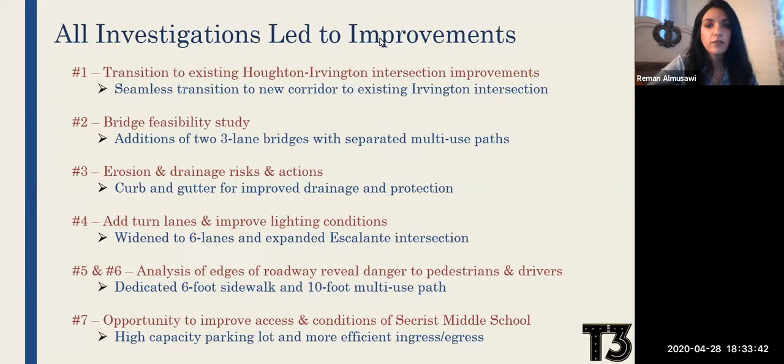Thank you, Reman. To begin, you can see on this slide the opportunities that we committed to investigate nearly one year ago. Since then, all the alternatives for every single one of these objects listed on the slide were investigated to ensure we designed the most efficient product for each of these challenges and opportunities. Every one of these challenges was looked at as an opportunity, requiring coordination and collaboration of multiple team members from different disciplines. The successful design meetings and discussions between the disciplines demanded that we found the best solution, not only for the immediate improvement of this corridor, but also for the future service and sustainability of Houghton Road. The complete study of these opportunities exemplifies the dedication T3 had to every detail of this project.

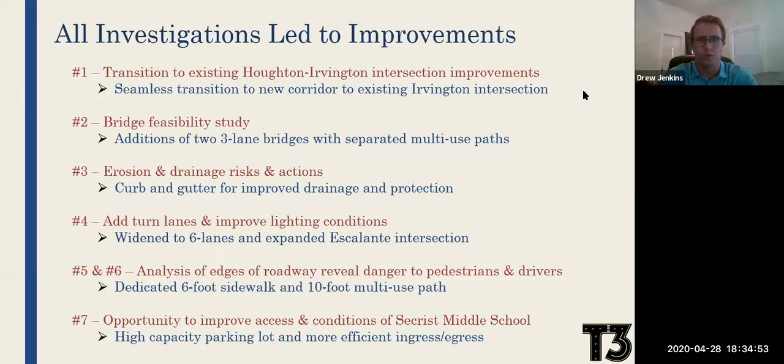As you can see, every single one of our investigations resulted in an improvement that has created a very successful project overall. Now, as we move on to the next slide, we'll see some of the details for Houghton Road.

The design of the Houghton Road corridor was very much focused on safety, not only for vehicles, but for vehicles and non-vehicle users as well. We started by looking at the safety of vehicles by expanding the roadway from 2 lanes to 6 lanes with a 20-foot median in the middle for a better level of service throughout the corridor. Also, for safety of the vehicle, we eliminated the erosion along the edges that was a safety hazard, and improved the drainage with the curb and gutter system and different culverts that we've installed, which Leo will be talking about later.

One of the other things we did to improve the safety of non-vehicle users: on the west side we have a 6-foot sidewalk, and on the east side we have a 10-foot multi-use path. On the bridge, we have a separated multi-use path with a barrier in front of it to ensure non-vehicle users are able to use all parts of the corridor safely without being too close to the roadway or interfering with traffic on the north and southbound lanes. All of these were considered and analyzed so we're able to use the maximum amount of space while purchasing the minimal amount of new land.

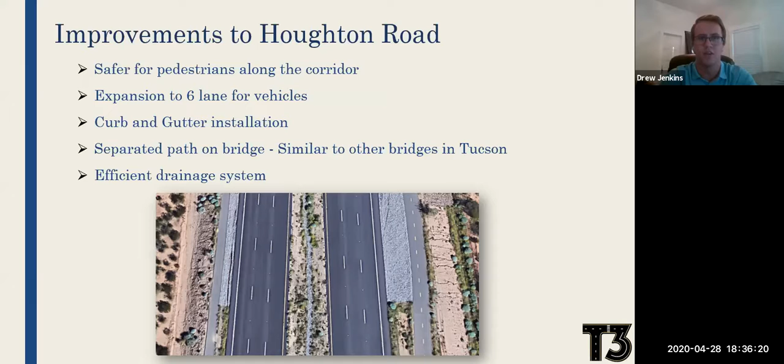As we move on to the next slide, some of the other improvements we've made outside of the Houghton Road corridor are at Secrist Middle School and the Escalante intersection. Beginning with the improvements at the Secrist intersection, we began with one purpose: to reduce the congestion during peak hours at pickup and drop off at the beginning and end of each day.

One of the ways we did that is by making better turnaround stations to get in and out of the school along the Houghton Road corridor, and also improving the ingress-egress for the bus turnaround so buses are able to more easily go in, pick up the students, and leave quickly. Another major consideration for these improvements was the safety of students, faculty, and parents approaching the school, which we addressed by redoing the parking lot so it's a lot safer during peak hours and also allows for a greater number of cars to be parked.

In addition to the change in parking lot design, we were able to add new parking spaces around the bus turnaround, so faculty staying late or sports coaches will be able to park there and stay out of the congestion during peak hours. Having a larger parking lot at Secrist will allow a bigger capacity for cars to park, which will also allow future growth for the school.

And some of the other intersection improvements we made in detail is the Escalante intersection. Escalante intersection was also designed with safety and sustainability in mind throughout its lifetime. We did this by improving the roadway itself, expanding it to have a dedicated left-hand turn lane and right-hand turn lane on the Escalante roadway, as well as dedicated left-hand turn lanes on the Houghton Road corridor.

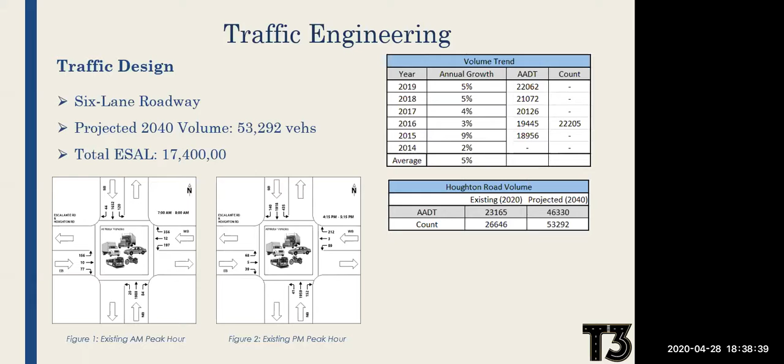Thank you, Drew. For this traffic design, we needed to make assumptions before we began. First, we knew we wanted a 6-lane roadway since we were tying into the existing roadway to the south of Houghton Road. From that, we needed to determine the number of projected vehicles we would have in 2040.

First, we needed to determine the volume trend. This we were able to take from PAG, the Pima Association of Governments. From there, we took an average and multiplied that by 20 years to get about 100% growth. This means we're expecting the roadway to have about double the current number of vehicles it has right now.

We were given 2 counts, one from PAG and one from an independent agency. We decided to go with a more conservative number by taking the largest count and multiplying that by 2. So as you can see, for the projected 2040 count, we're projecting about 53,292 vehicles along this roadway. Another assumption we needed to make was the total number of ESALs.

We predicted about 1,740,000 ESALs, which is used to determine our pavement design for this roadway. We're expecting no more than about Class 8 vehicles to be on this roadway.

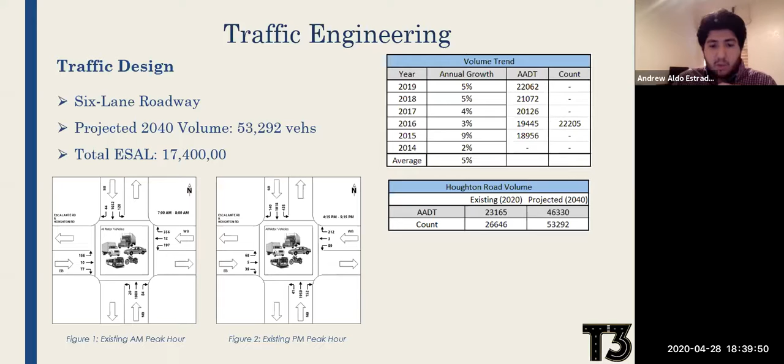In our next slide, I'll be discussing the lane geometry for the Escalante Road intersection. Along with this expansion of the roadway, we needed to redesign the intersection. First, we needed a new optimized signal as well as new turning lanes for the roadway. In order to determine this, we used Synchro.

Using Synchro, we were able to plug in what we knew so far, which was the number of vehicles, and test a bunch of different designs to see what met HCM and city standards. From that, as you can see in Figure 3, our intersection design, we have 3 lanes going both north and south, and 1 lane going east and west.

Each approach has a left turning lane. However, for this project, we assumed that only the north and westbound approaches would require a right turning lane. As well, in Figure 4 you can see the turning phases that we will have for this project.

So we would have protected phases for just the left turns, and then we would have protected-permissive phases for the right turns. At the bottom, you can see the lanes we determined for the turning movements based on the LOS, delay, and queuing we see along these turning movements.

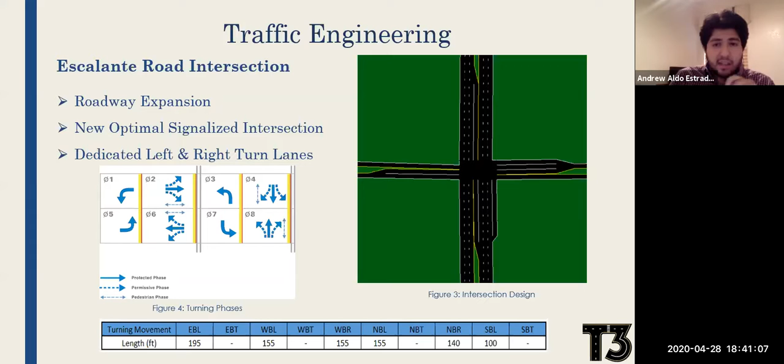So we know that this roadway will effectively be efficient for working in 2040, when we would be looking at this roadway again to see if it needs any new updates. We know that this project meets the requirements and has a lot of room for growth based on the design we've done so far.

Currently, we only have right turning lanes on 2 approaches. If we add more right turning lanes, we can easily increase the serviceability of this roadway, and we would focus more on working with the city and seeing what they want in their future design.

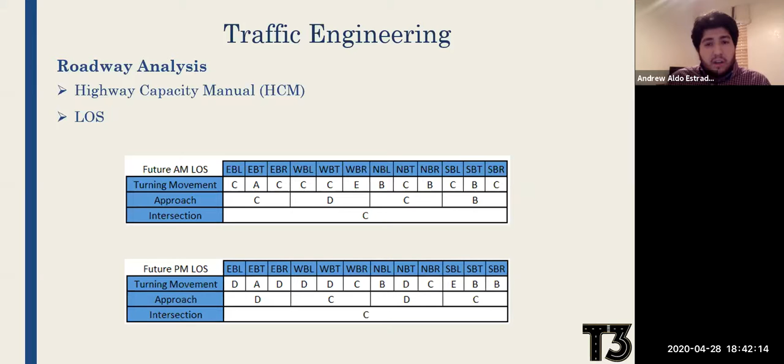Lastly, on our last slide, we're going to talk about traffic safety and crash data. From the crash data we were given back in 2007, we saw that the Escalante intersection had about 12.8 crashes per year, and Pantano Trail had about 1.8 crashes a year. Pantano Trail is a small intersection that comes into Houghton that isn't really seen, so it's quite dangerous, and there's no real stop sign there.

We know we're going to make safety improvements to this roadway from what it has currently. Right now there is no median, no turning lane, no curbs. So we're adding a new 20-foot median, as well as curbs and 6-foot shoulders, which should increase safety for the roadway, along with new signalized timing so vehicles can quickly move through the intersection without delay, as well as adding right turn lanes and dedicated left turn lanes so it's easier for vehicles to turn.

Another important aspect of this roadway is pedestrians. We're adding a multi-use path since they'll be using this roadway as well. This is a very density-filled roadway that will soon develop—the area isn't really developed right now, but later it will be. So we want to make sure pedestrians have the opportunity to safely cross the roadway and travel along it, which is why we're putting about a 10-foot space between the edge of the roadway and the multi-use path.

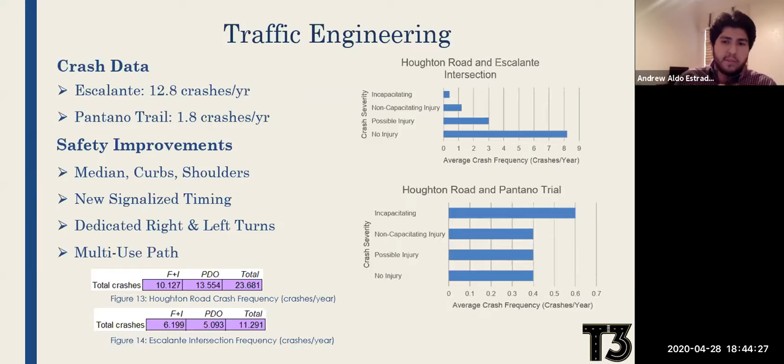So next, I'd like to pass it off to Leo, who will be discussing the hydraulics for the project.

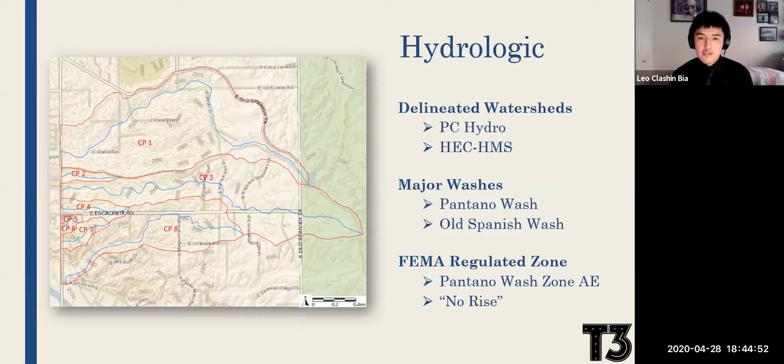Thank you, Andrew. For our hydrologic analysis, we focused on 8 concentration points. For these, we delineated the watershed in Civil 3D on 2-foot contours provided by Pima County. 5 of the concentration points were calculated in PC Hydro for 100-year events, while others were given by the City of Tucson. Notable washes are the Pantano Wash and the Old Spanish Wash.

The Pantano Wash is a FEMA regulated zone, so it has extra requirements such as no rise—meaning it cannot rise in elevation more than 0.1 feet.

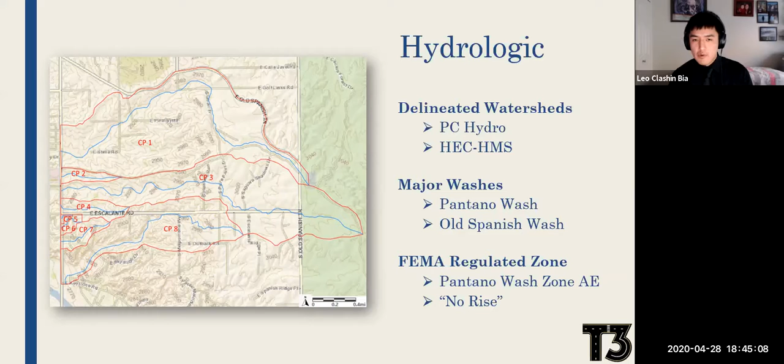On our next slide, for our hydraulic features, the culverts, we designed 8 culverts with a 1.1 to 1.5 ratio for culvert height to headwater. For culvert 5, we were able to extend it since it already dissipated the existing discharge of the wash. For culvert 8, the sedimentation value was over 1, so that culvert would possibly need maintenance in the future.

Also for right-of-way, we designed the culverts so they don't rise over 1 foot from existing to proposed conditions. For erosion mitigation, it follows the no-rise or right-of-way requirement.

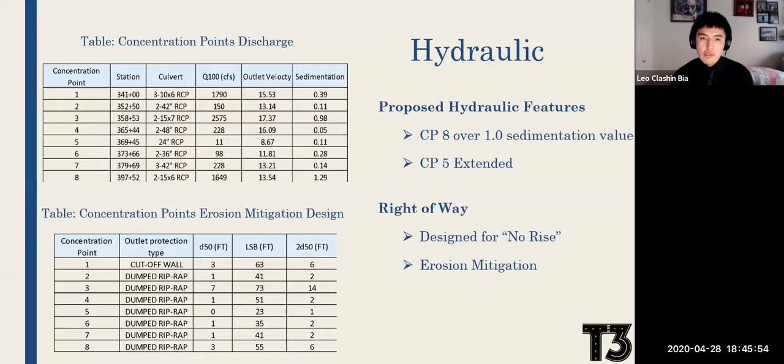On our next slide, we'll go over the Pantano Wash Bridge. For this bridge, we cut out a cross section to create extra area for discharge to go under the bridge. This was done since the existing bridge only had 0.5 feet of freeboard, and our proposed design now has 5.0 feet. The required 3.0 feet was increased to 5 since we cut out a cross section.

There's potential for equilibrium sedimentation, so there's possibly a smaller cross section needed in the future. We accounted for that to accommodate potential sedimentation down the line.

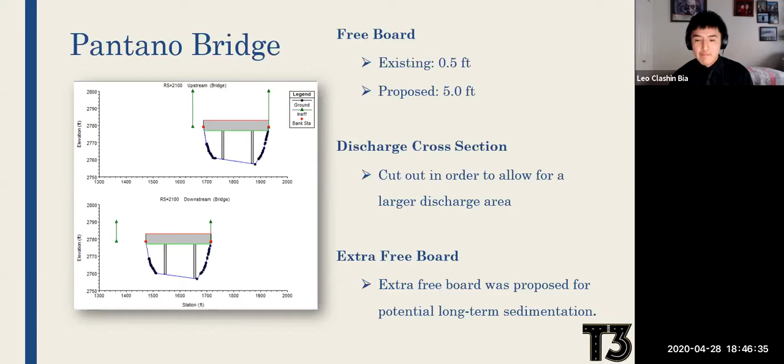Now I'll pass it on to Ariana, our geotechnical lead.

Thank you very much, Leo. So yes, I'm going to be talking about the geotechnical and roadway design aspects of this project.

We're going to start with the piles under the bridge. To start, we were given 5 borings. They went down 126 feet and were located at 5 locations along the bridge track. What we found looking at these borings was that almost all of it was sand. We didn't reach the water table in those 126 feet. There was no bedrock, no caliche—it was basically sand all the way down.

Because the measurements were taken using the standard penetration test, we used a method for calculating the force that a pile can sustain that directly uses values from that test. You can see the results on this chart, where the different colors show the different diameters: 4, 6, and 8 feet. The other thing we had to consider was scour.

The predicted 100-year scour in the 100-year flood is 51 feet, so we assumed those first 51 feet provided no support. We found that an appropriate pile to take the calculated 780 kips of force on this bridge would be 8 feet in diameter and 66 feet deep.

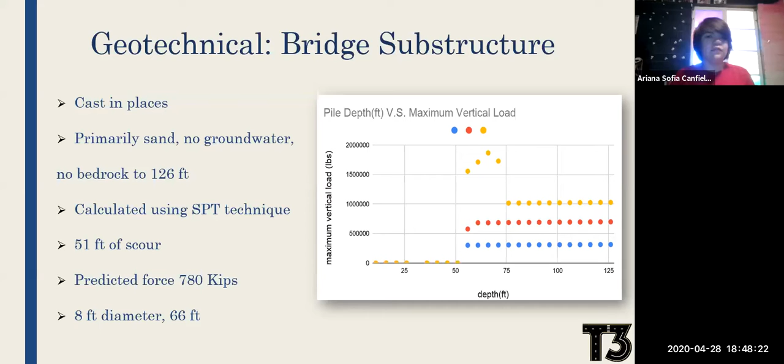Looking at the soils under the roadway, there was some concern that we'd see acidic soils. Luckily they're non-acidic, and they're also very low in silt, so they have very little collapse potential. That's something we don't need to worry about.

There are some expanding clays present in some layers, but not very much, and we think we can mitigate any deleterious effects from them by just mixing our soils.

For our actual roadway design, we were given the ESALs by our traffic team, and based on those and the measurements taken, we got a structural number of 4.95. This number is pretty large, reflecting a fair amount of uncertainty that could perhaps be decreased with additional measurements. But using this value, we can accommodate it with 6 inches of asphalt and 18 inches of aggregate base.

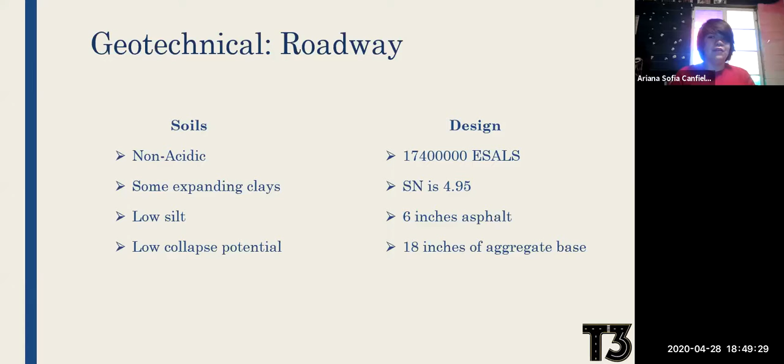And now I'd like to pass it off to our structures team, starting with Joel Hernandez.

Thank you, Ariana. Right now, as you can see, that's how the bridge currently looks on present day. When we were designing this bridge, the first thing we took into account was that when you're going up the bridge, there are 3 lanes merging into 1 lane, and that could cause a potential accident because of people who may be reckless or distracted while driving on the bridge.

So we coordinated with roadway and were able to get a new design going. We decided to design 2 bridges, one for each direction, each having 3 lanes. The reason we did that is because it will be more cost effective, as we currently looked through our different designs, since we also considered widening the bridge.

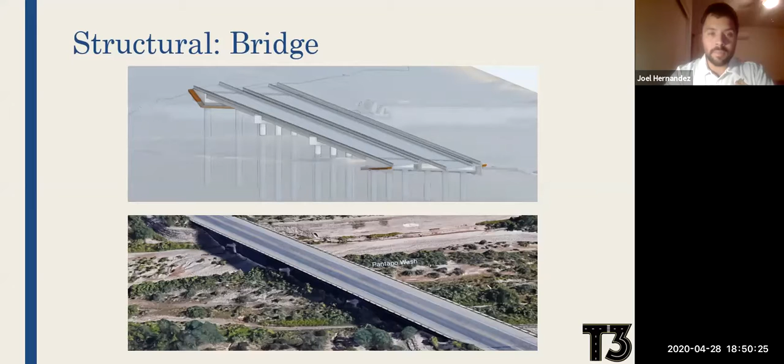If you go to the next slide, here's how the design looks. Currently, that was one of the things we were looking at.

Another thing we wanted to take into account was that the bridge is currently not up to code. Due to the rising population in the area, we noted this was another main concern. One of the things we did was look at other structural elements and speak with other entities. Now Danny's going to talk to you guys about the drilled shaft and other structural elements we were looking at.

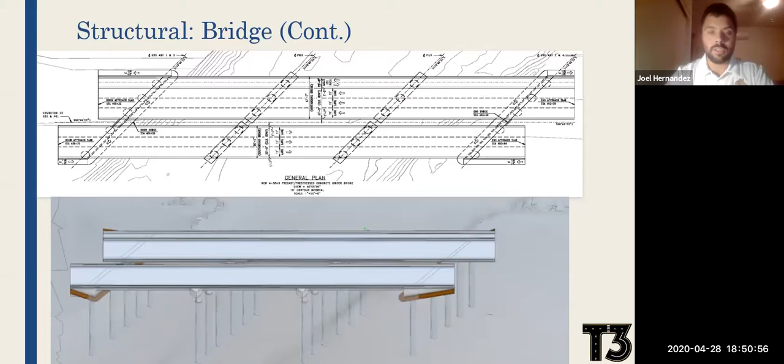Thank you, Joel. What's important to note are 3 things. First, we had to coordinate with hydraulics to determine water level and freeboard height due to the 100-year event in Pantano Wash. Second, we had to raise the bridge approximately 10 feet vertically to accommodate the pathway below, allowing pedestrians to move from the southbound side to the northbound side to utilize the multi-use path as mentioned before.

Third, the use of a 3-span design with AASHTO Type 5 girders at 120-foot spans, totaling 360 feet end to end. These design parameters provide economic benefits and, as mentioned earlier, are commonly used design practices in Pima County.

As for the substructure, using HS20 loading per AASHTO standards and per traffic's recommendations, we calculated the maximum axial load transfer of 780 kips each. With this information, Geotechnical was able to determine the required depth of the 8-foot diameter drilled shafts, recommended at 66 feet deep. Furthermore, due to the 3-span design, we were able to significantly limit the cost by utilizing fewer drilled shafts overall, as construction will point out later in this presentation.

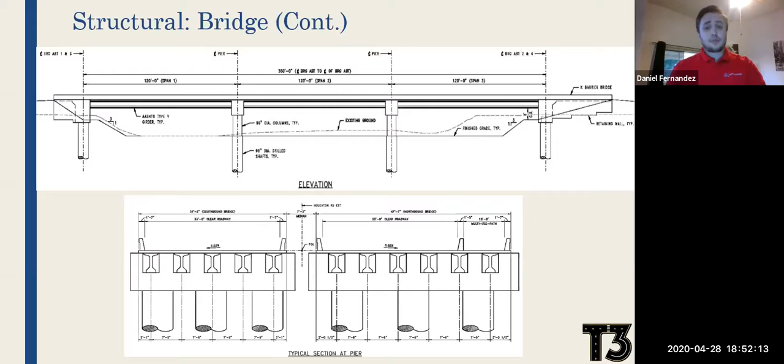Another area just as valuable as structural, believe it or not, is our very own environmental. Edgar is going to go over the environmental aspects of this project. Thank you.

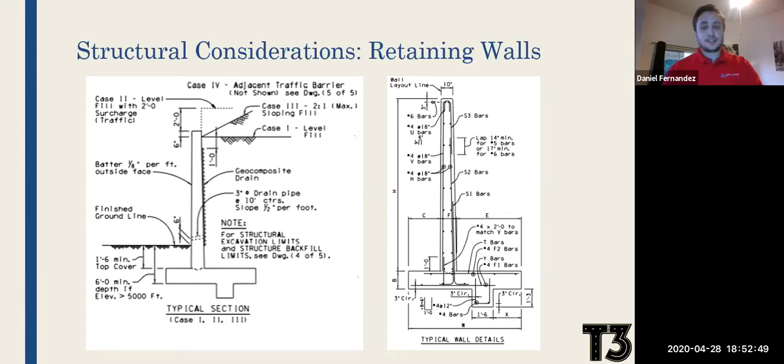Thank you, Danny. So the two important aspects to consider for the environmental portion of the project start with the SWPPP. The SWPPP focuses on several points that include the soil types, disturbed area, control measures, training, and monitoring, as well as the BMPs shown on the site maps. These BMPs include erosion, pollution, and sediment control parameters. In addition, these BMPs are also in compliance with the county as well as the EPA.

So the main point we learned from Envision was that each project is unique. And using Envision, we were able to boost the sustainability and efficiency of the roadway for the community. So next we have Will discussing construction for the project.

So construction really took two approaches to this project. First, our goal obviously was to maximize the pricing savings through both engineering methods in the design phase, as well as creative construction solutions in the construction phase, as well as give the owner a good idea of the total project cost and schedule.

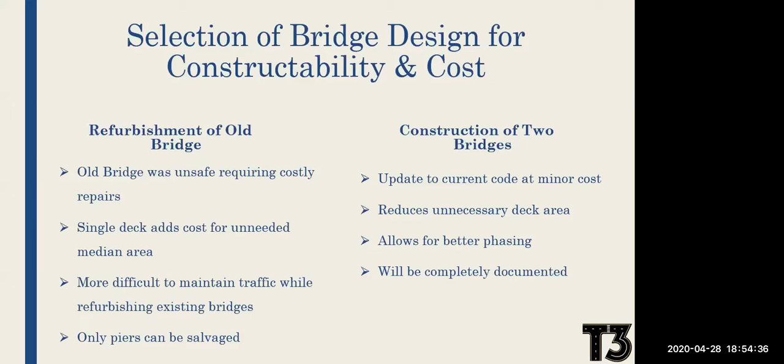So in this first section here, we're going to talk about how we looked at the bridge, which is one of the largest cost drivers on this project, and how we had two main options. We could either refurbish the old bridge or construct two new bridges from the ground up. As you heard prior in this presentation, refurbishment of the old bridge had several issues with it. It would pretty much involve taking it down just to the piers and the caps, and then rebuilding a complete new deck that could sustain the size of this roadway, along with additional piers and caps to support the expanded roadway alignment. That didn't really save very much money. There wasn't much advantage to it.

So we went ahead and took a hard look at the construction of two new bridges. Not only does this allow us to update completely to modern codes, it reduces a lot of unnecessary deck area where the median is by allowing just an air gap separation. It also allows for better construction phasing to minimize the disruption to the community. It also gives us an opportunity to completely document the new bridge with quality as-builts that are lacking for the current bridge. And these quality as-builts will make it much easier if the roadway ever needs to be expanded or reconstructed again in the future. So can we go to the next slide?

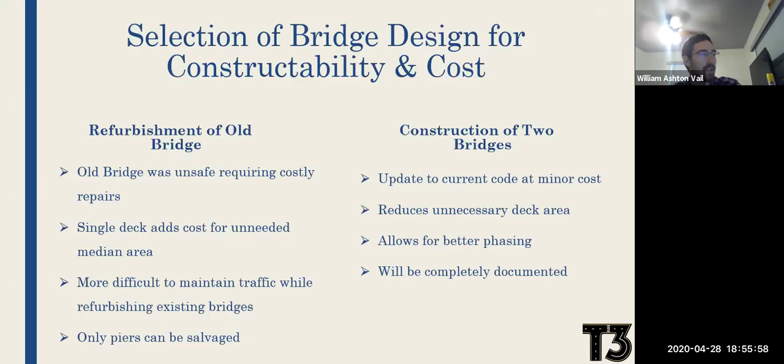Looking at overall cost, without project modifiers like contingency, maintenance of traffic, and SWPPP controls, the pure construction cost comes in at about $17 million. With those modifiers, that's boosted up to about $35 million. Factoring in final design as well as construction management services throughout the life of the project, that brings us to $39 million as the in-place cost for the owner.

For the actual construction costs, the bridge is obviously the largest at $6.2 million, followed by earthwork at 4.8, pavement costs at 2.9 million, and concrete costs at 2.2. It's important to note that this concrete does not include any of the structural concrete for the bridge or abutments. It's mostly flat work and bus bay paving for future bus bays for SunTran. All right, next slide.

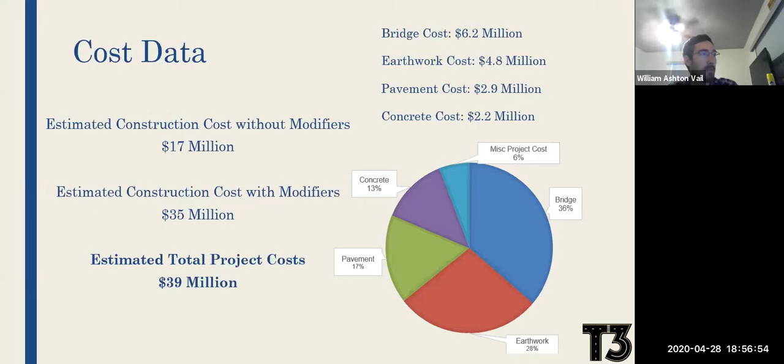Getting into a proposed sequence of schedules, we have 4 linear phases and then one phase 5 that doesn't necessarily fit in linearly. We're going to start with our northbound section. This will be a completely new alignment outside of the scope of the current roadway. So we'll get in there, we'll clear a way for it, get access to the wash, completely construct the new bridge, complete the earthwork, the flat work, and all the initial paving, and then prep for landscape.

This will give us a roadway that we can shift our current two-way traffic onto for phase 2 and 3. Phase 2 and 3 would involve demolition of the existing southbound bridge and alignment, and then reconstruction of that alignment to the new 3-lane cross-section with median and bike paths standards.

Phase 4 would kind of be the final touch-up. That would include any final landscaping, and then a final lift of asphalt throughout the whole project. So that way, during construction, the shift overs, we're not marring the final drive surface, and it looks good for years to come, as well as any site cleanup.

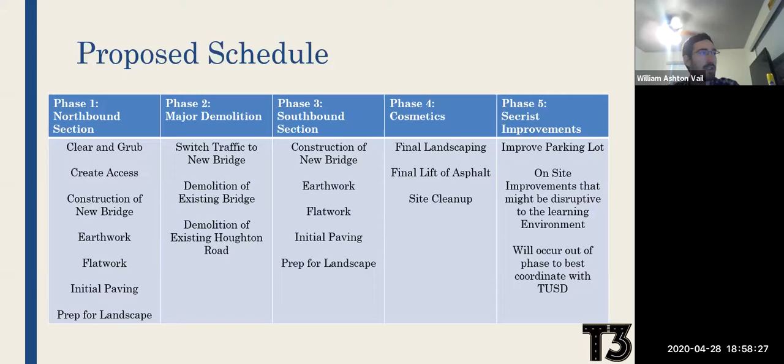Phase 5 is, as I mentioned, that out of sequence phase. That's so we can conduct work at Secrist Middle School when it's most convenient for TUSD. You don't want to be building on a school during the school year. That project needs to mostly occur in little sections during the summer months. That way we're not interfering with that learning environment. All right, I'm going to pass it off to Jess now to discuss utility coordination.

Okay, thanks, Will. So this is just a quick overview of all the existing utilities that we're currently having on site. They're pretty common companies found in Tucson. The main overhead utilities located on this project are owned by TEP. There's 2 major lines running along the boundaries of the project, the power lines and then the distribution lines.

Our main concern is the power lines located on the east side of the road, running the entirety of the project, for they're in close proximity to the existing roadway, and they'll need to be relocated. Burying these lines has been taken into consideration, and we plan to do that for the majority of them. The distribution lines are located on the west side, running on the southern end of the project, and will also need to be relocated in order to widen the existing road.

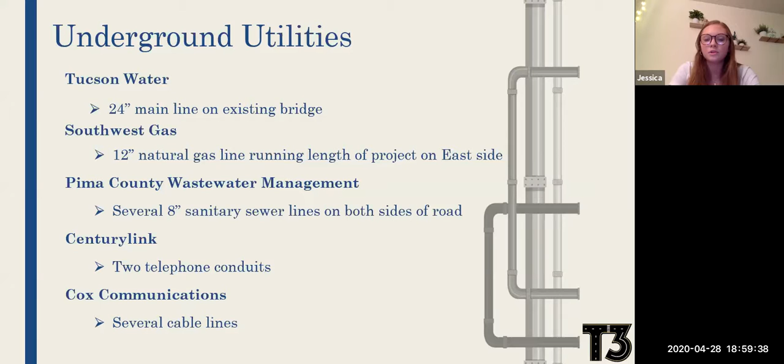And if we go to the next slide, these are the underground utilities we anticipate on relocating or protecting during the construction phase. And these are all explained in more detail in our report. So just for time reasons, I'm not going to go into too much depth on those.

But with this relocation of the utilities, here at T3, we see the importance of coordinating with those companies and also the agencies involved in the project. Ownership and prior rights is discussed in order to relocate each utility to standard. So our communication with the city, Pima County, RTA, and the U.S. Fish and Wildlife Service ensures that we have a smooth construction process. We have confirmed that the project area does not occur within any critical habitats, which is a good thing.

And then if we go to the next slide, as we know, construction of the road is anticipated to take several months to complete, and the surrounding land is primarily residential subdivisions. So here at T3, we understand the burden that the extensive construction work can place on the surrounding community. Therefore, the neighborhoods and businesses will remain open and accessible all throughout the construction phases. We plan to do this by maintaining 1-lane traffic in each direction at a minimum.

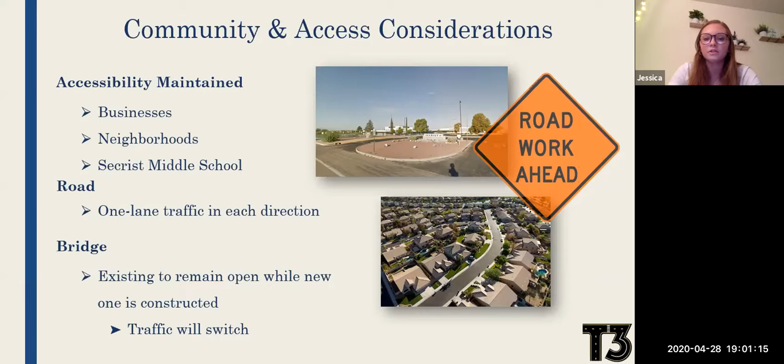And then the existing bridge will remain open while the new bridge is being built. And then once that's completed, the traffic will switch, allowing the existing bridge to be updated. And then when it comes to that middle school, like we said, we plan on not doing construction while it's in session and over the summer, but if push comes to shove and we have to, we do want to also coordinate with the district to ensure the students, the faculty, and the parents are all aware of the construction going on during the school year. And now I'm going to pass it on to Rima to end the presentation.

Awesome. Thank you, guys. All right. So as you can see, this project has required a great deal of cross-discipline collaboration. Some of the key features here, such as our 6-lane roadway, the multi-use pathway, the ADA compliance improvements, drainage improvements, the new bridge, and even the land that we've reserved for future bus pullouts, have all ensured that our 20-year design will continue to service the community as it grows.

Now, keep in mind that the plans that we've presented are about 15 to 20% complete. So we still have more refinements to make, more collaborations to work through, more improvements to come. Now, with that, we'd like to thank you guys for your time and ask you if you have any questions.

Hi, this is Anna. I have a question on the cost, and I might have missed it, but what did you mean by the modifiers? So the modifiers were a set of pre-given percentage add-ins that we were given from the instructor. In this case, they would likely include the contingency just to account for the fact the project's not fully designed yet, so we can't do a complete cost estimate. That was 40%, right off the bat, of a cost increase. So we took the construction cost, multiplied it by 1.4.